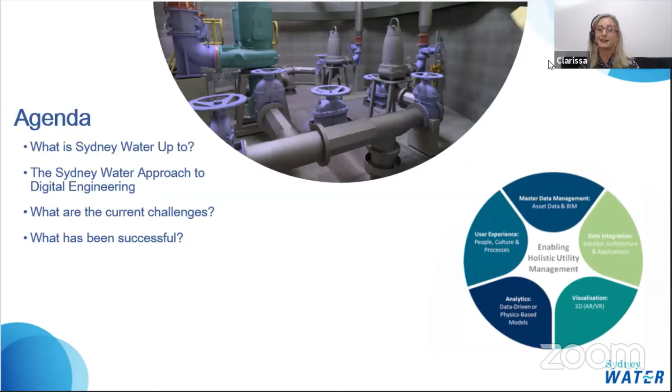So to start this digital engineering journey, we have developed a new digital engineering standard to guide our way through this at Sydney Water.

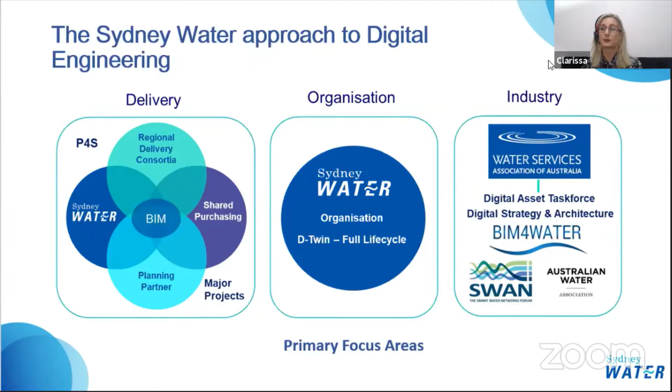So the Sydney Water approach to digital engineering: we've got delivery, which I'll explain in the next slide, and we've got organisation, which is digital twins, and looking at a proof of concept to show that full life cycle benefit. We're also working with industry - we're working with WSAA, and we're working with BIM for Water, the Australian Water Association, and of course SWAN. Next slide, please.

So what we recently did is change the way that we plan and deliver our projects at Sydney Water by the introduction of P4S. P4S stands for Partnering for Success, and it includes 3 regional consortia consisting of multiple companies who have come together to provide design, construction, maintenance, and facility management services on a regional basis in the north, the south, and the west. We did this to drive innovation, efficiency, and increased certainty of delivery, which creates increased value for our customers.

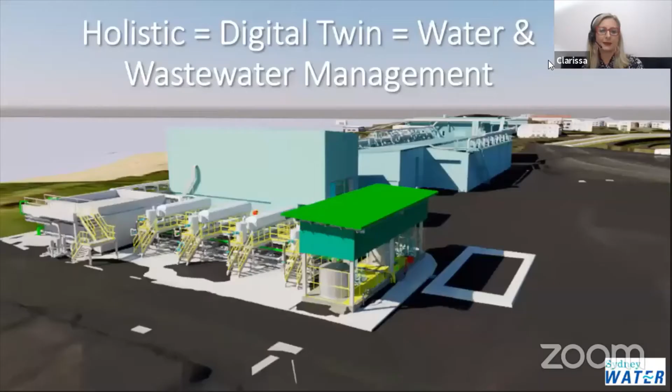Next slide, please. So to sum up, remember, your key to success is use a staged approach and work in collaboration with everyone when you're building your digital twin. Thank you.

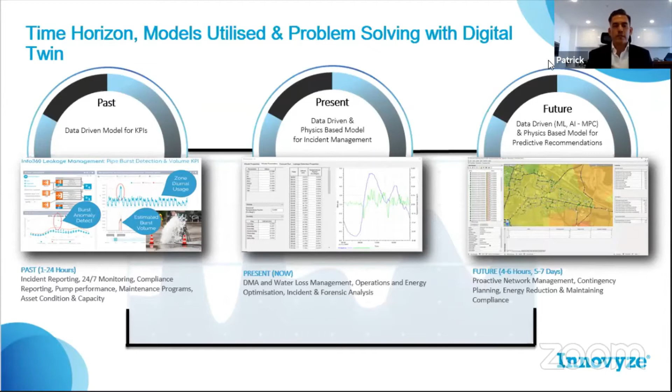Thanks. So the Water Corporation is a very large water utility which provides water and wastewater services to more than 2 million people spread out across all of Western Australia.

It operates a number of schemes. The main one we call the Integrated Water Supply Scheme, which serves the Perth metropolitan area. This area is quite extended and low density, and although it's quite young by international standards, it's starting to age, which prompts issues of performance and requirement for optimization.

For this reason, this year we have started a research and development project through the Water Research Foundation, where we partner with Innovyze to investigate how smart water network technologies could assist us in achieving some of our corporate goals, namely a reduction of leaks and bursts, reduction of customer interruptions, deferral of capital work, and extension where possible of asset life.

Moving to the next slide, please.

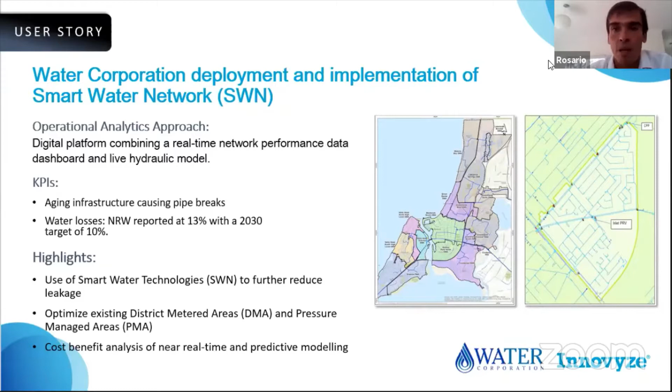These smart water network technologies consist of two components. The first one is a dashboard, which has fundamentally an asset management kind of use, meant to assist us in asset management decisions. What it does is interrogate and query field data as well as SCADA data to determine some KPIs in our networks.

On the other hand, the fact that we can plot performance, ILI performance of our study areas, in a simple graph really does help us identify which areas perform worse than others and help us focus on some areas in terms of activities like leak detection and repair.

The second aspect was developing a tool which could identify leaks as they occurred in the system. So we ran a field test where we actually opened an hydrant overnight, and we were trying to achieve approximately 10% of the minimum night flow for that DMA out of the hydrant overnight.

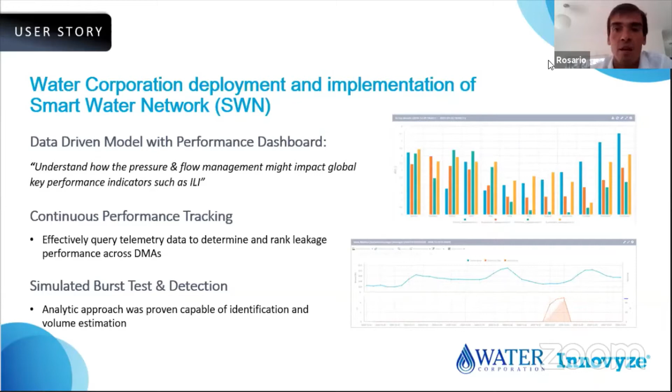The interesting point here is that we were targeting a small magnitude of leak, which in our soils that are mostly sandy would probably go undetected for quite some time, which over time would determine quite a bit of water loss. Moving to the next slide, we go into the second component of this technology, which is a live model.

The live model that we created, we use fundamentally with the idea of managing pressure managed areas. So for 2 pressure managed areas, we use this live model to assist us in a modified operation where we would further drop pressure overnight to try and reduce background leakage.

We are still using these new optimized settings, because in the long run we want to be able to collect enough data to understand whether background leakage is something that we are really interested in reducing, and if this is an effective way to do that.

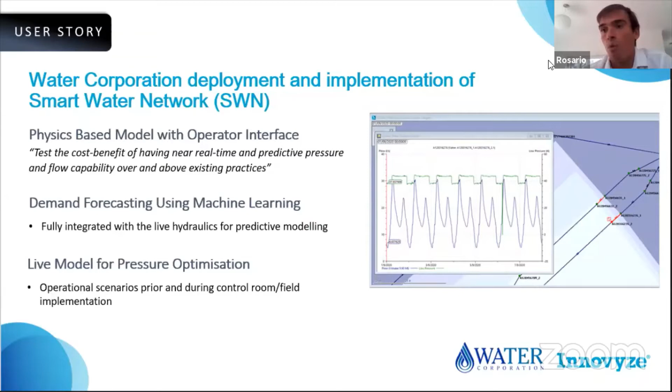The main element here is that creating a live model means we put effort into creating a model which updates itself, updates its controls from available SCADA, and updates its demand in real time, predicting demand that is going to occur in the next 48 hours. With that in mind, the model doesn't really need a modeler anymore to update itself, and it can live in an environment such as the control room, where operators can use it to effectively plan for their own contingency and create their system change instructions without having to come to planning to seek our advice. That would streamline our workload.

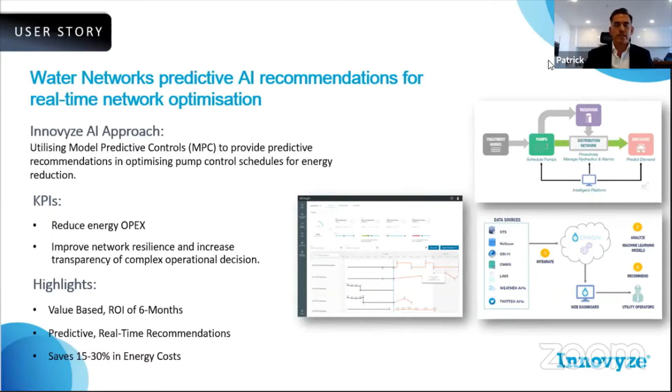Outcomes we're seeing so far on projects of this nature are payback periods of around 6 months, and that translates into 15 to 30% energy savings. If we could just go to the next slide.

You're looking at the present moment, the present time horizon, used to generate alerts based on incidents occurring in the network, which are then, with the physics-based model, used to generate what-if scenarios and contingency responses. Then the future scenario, the future time horizon, we forecast network demand that informs our operational hydraulic models. And now with AI, that provides predictive recommendations to the end user.

From a cloud standpoint, what often inhibits technology adoption or getting projects of this nature off the ground is IT constraints - speccing and sourcing your servers for storage capacity, compute power, and resourcing. Cloud platform technology in the water industry has matured to a point where scalability of these systems is enabled for the compute power and the shared services between model combinations, now exposed to a single workflow for the end user.

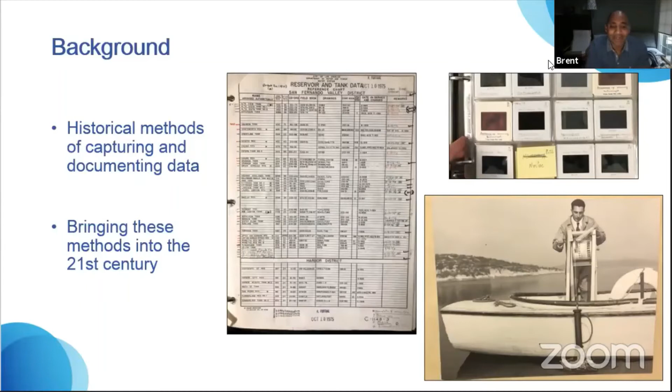Thanks, Brent. This is Daniel again. I just want to start off, before we get to the digital twin, with a little bit more background on our motivation behind this project. As mentioned briefly at the start, I'm one of the developers of the so-called WIN project here, or the Water Information Network project. This project is basically our water system's smart utility initiative.

One of the main driving forces is that many tasks that we do or want to do become a lot easier when our data is centralized and accessible and we're using the right sort of software. What has happened throughout the many years of our company's existence is that databases and platforms all fully matured on their own, totally separate from each other. So part of what we're doing as the WIN project is bringing these databases together to achieve end results like the one we're covering today.

Circling back to algae monitoring, we as the WIN team sat down with our internal water quality division and figured out just what kind of data is relevant and where that data is living within the department. For this model specifically, we decided to incorporate our internal LIMS water quality data, our SCADA systems for things such as flow rate, and NOAA weather data for local temperature.

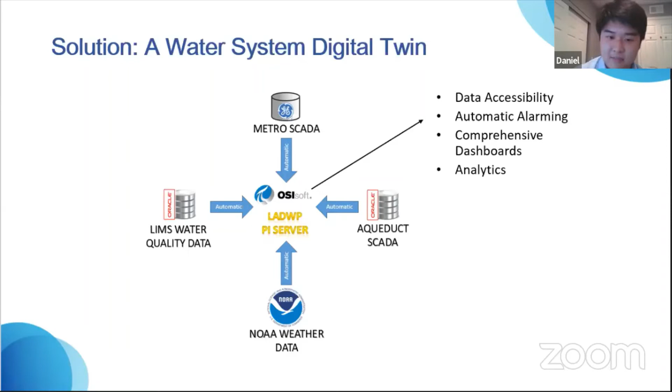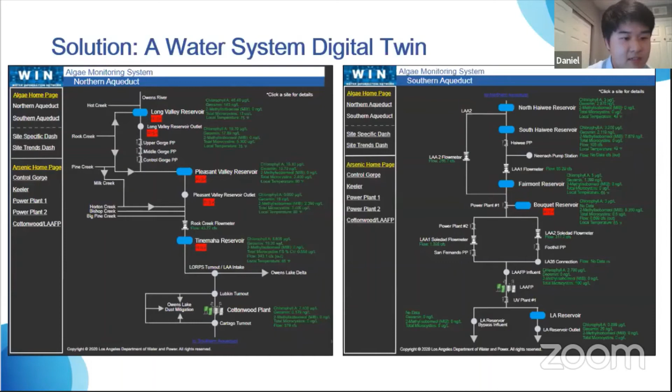So I want to turn it over to Brent, who will talk more about where we want to take this. But thanks.

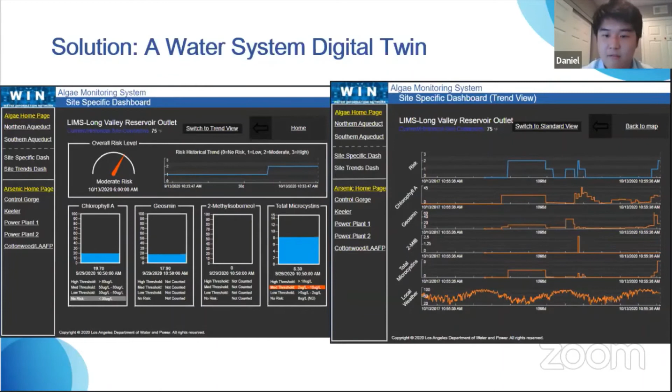Thanks, Daniel. So just to recap, I anticipate this tool helping my group in the visualization and understanding of our collected data. It can definitely help us in our algal monitoring, plan coordination, and rollout, and basically allow us to make better operational recommendations and assessments. Instead of having to compile all this data through successive queries, we now have a one-stop shop for everything we need to know, see, and visualize.

This model is just the first step. We definitely have plans to expand it and build it out in the future. That build out could include technologies like remote monitoring sensors, which we're currently testing out, and some remote monitoring buoys that will allow us to have real-time water parameter results that could be added to this model. We also do algal toxin mRNA PCR, qPCR analysis, and that could be added to this model as well.

For additional predictive purposes, obviously the end goal is to have a fully predictive model, which is the holy grail, and it's something we're definitely trying to achieve. But in water quality, our ultimate goal is to provide the end user, our customers, with the highest quality of water possible. This tool can help align us with those intentions for sure. Thank you very much.